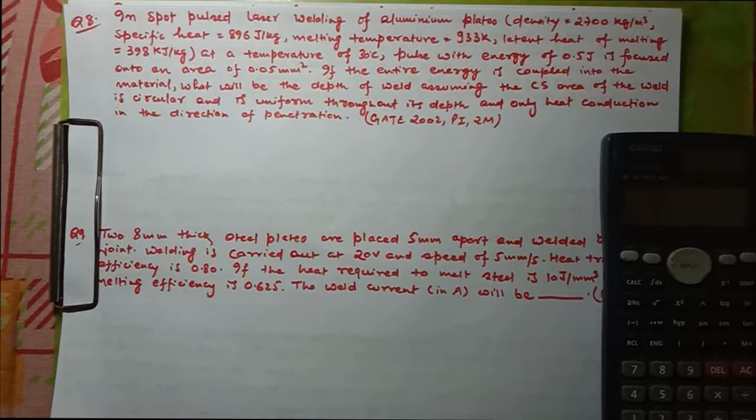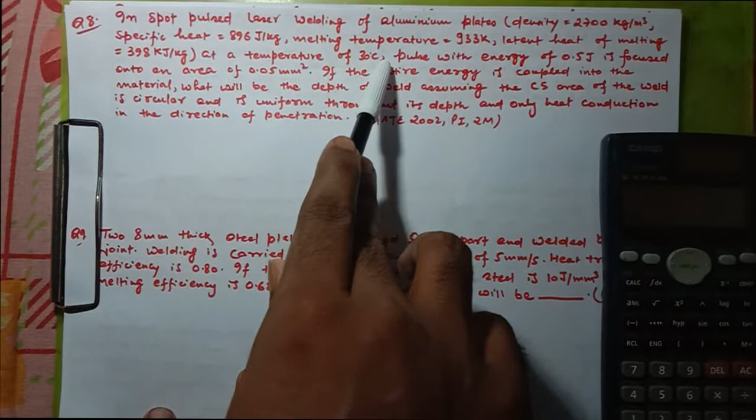अब वीडियो शुरू करते हैं। आज का पहला क्वेश्चन है: in spot pulsed laser welding of aluminium plates, the density, specific heat capacity, melting temperature and latent heat of melting data are given. In spot pulsed laser welding of aluminium plates at a temperature of 30 degree Celsius — this is the temperature from where you are starting the weld operation — pulse with energy of 0.5 joules is focused onto an area of 0.05 mm square. If the entire energy is coupled into the material, what will be the depth of the weld, assuming the cross section area of the weld is circular and uniform throughout its depth, and only heat conduction in the direction of penetration? This question was asked in GATE 2002 production engineering for 2 marks.

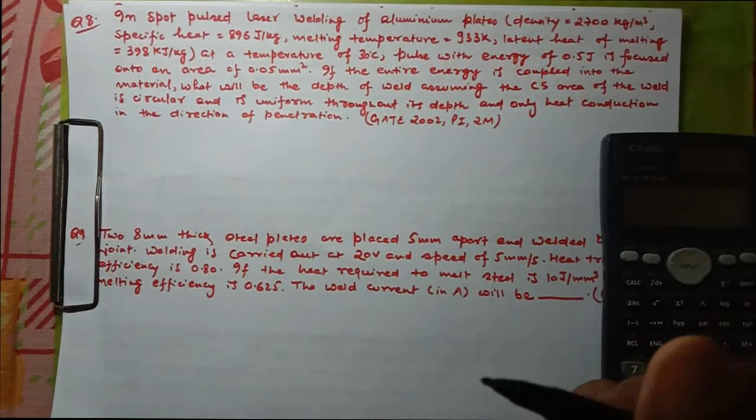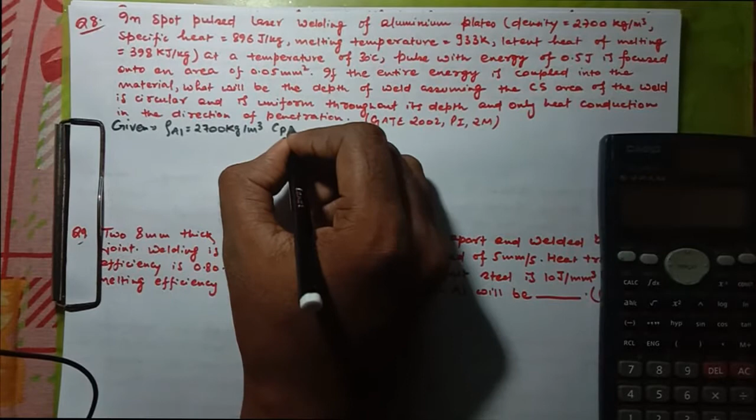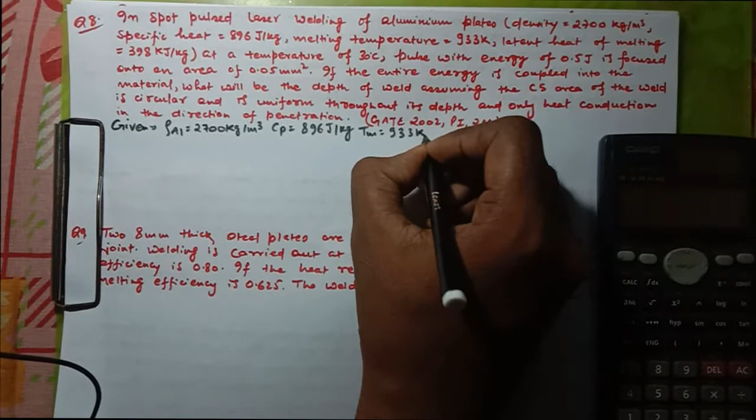So let us see how can we solve the question. First write down the given data. Density of aluminium is 2700 kg per meter cube. Specific heat of aluminium is 896 joule per kg. The melting temperature is given as 933 Kelvin, along with the latent heat of melting, that is 398 kilojoule per kg.

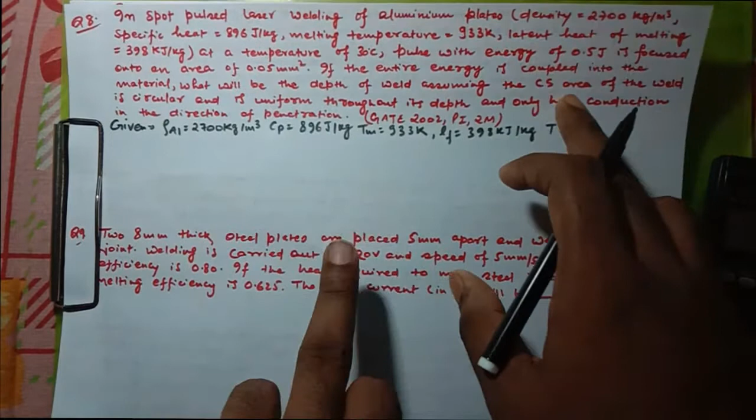साथ साथ में आपको रूम टेम्परेचर भी दिया गया है, और यह टेम्परेचर 30 डिग्री सेल्सियस है। अब यहाँ पर बहुत सावधान रहना है। मेल्टिंग टेम्परेचर केल्विन में दिया गया है, 933 केल्विन, बट जो रूम टेम्परेचर है जहां से आप वेल्डिंग स्टार्ट कर रहे हैं, वह डिग्री सेल्सियस में दिया गया है। सो यू हैव टू कन्वर्ट इट इनटू केल्विन, और यह 30 डिग्री सेल्सियस 303 केल्विन बन जाता है। अब इसके बाद हमें दी गई है पल्स विथ एनर्जी।

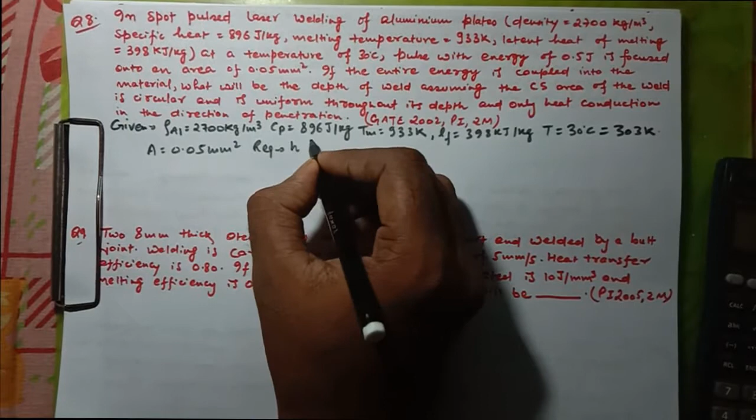How can we solve this question? First of all, we will try to find out the volume of the metal that is to be welded.

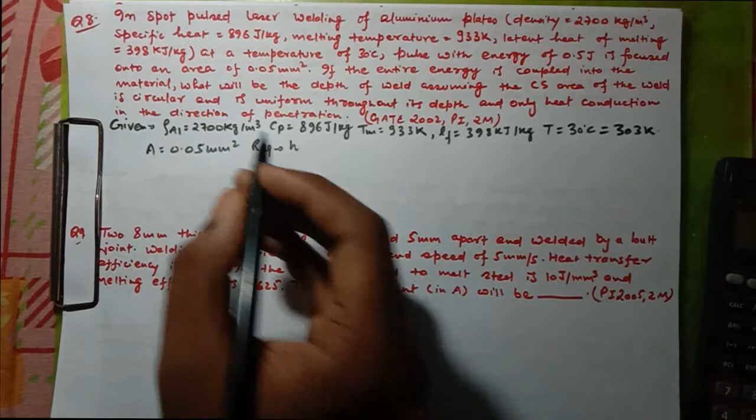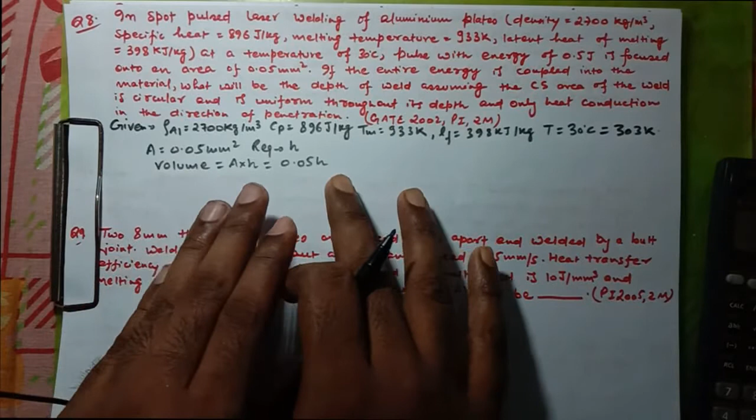So volume to be melted or welded, that is A into H, area into the depth H, that is 0.05 H. Now in order to melt this much volume, how much energy you will have to supply? This can be found out using the equation mc delta T, where delta T represents the temperature difference between the melting temperature and the room temperature from where you are starting the welding operation. So this Q, the heat required for melting this much volume, will be given by mc delta T plus mass into latent heat of melting or latent heat of fusion. This will give you the heat which is required to weld or melt this much volume.

Mass value is not given to you. In order to find out mass, what you will do is multiply density with volume. Density is given to you, that is 2700 kg per meter cube, into volume, which you have just calculated to be 0.05 H.

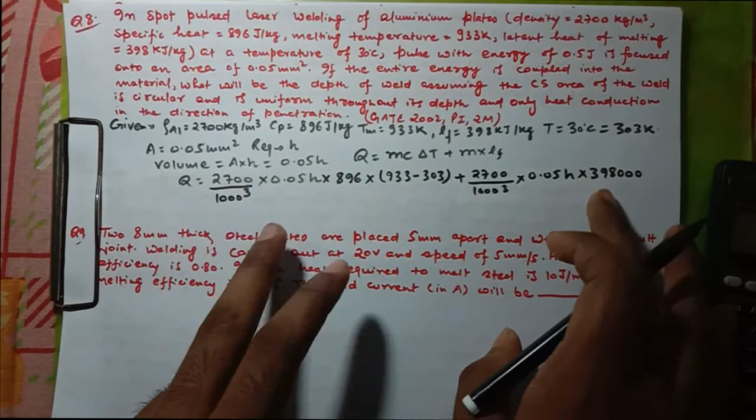So mass, again we can calculate by the same concept, that is 2700 by 1000 whole cube into the volume, that is 0.05 H, into latent heat of fusion, which is given as 398,000 joule per kg. So after adding these two expressions, we can get the total heat required for melting the metal.

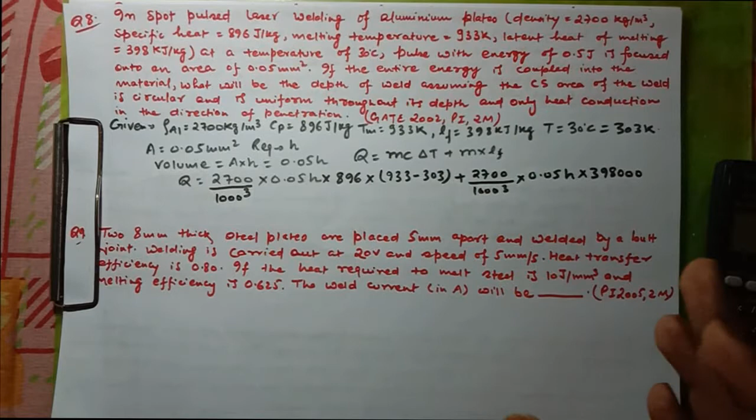Now where is this heat coming from? This heat is coming from the pulse which you are supplying onto the area. This data is given in the question, and that pulse is 0.5 joules. The 0.5 joules pulse of energy you are giving is providing the heat for raising the temperature up to the melting temperature and also changing its phase.

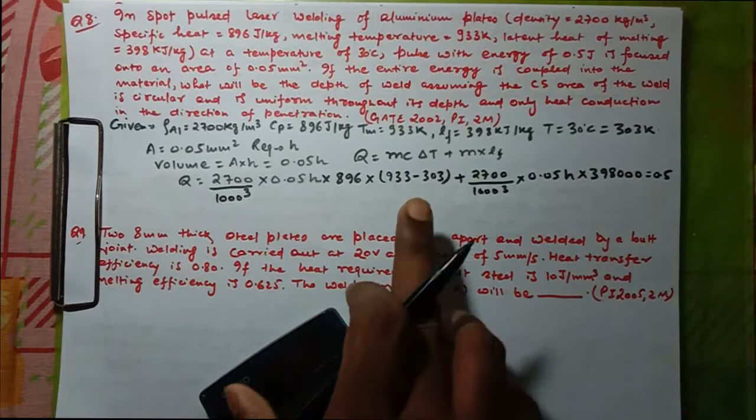So this total heat is coming from where? It is coming from 0.5 joules. Now you can clearly see that in this equation the only unknown is H. So after solving this equation, we can get the value of H. Let us solve this equation.

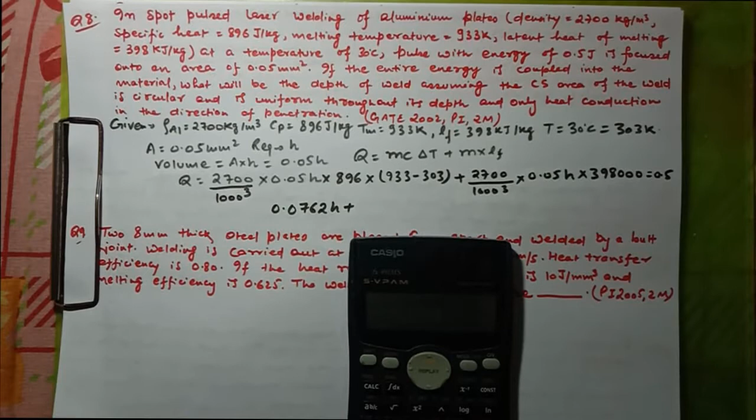This is 2700 into 0.05 into 896 into (933 minus 303) divided by 1000 whole cube. This comes equal to 0.0762 H plus 2700 into 0.05 into 398,000 divided by 1000 whole cube. This comes equal to 0.0537 H, which is equal to 0.5.

Now you can easily solve to find H, and that is 0.5 divided by 0.0762 plus 0.0537. So the value of H comes equal to 3.849 mm, which is approximately equal to 3.85 mm.

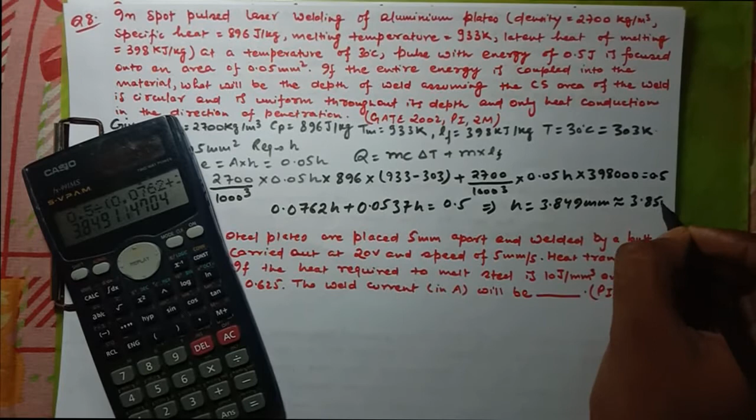So this was the solution for the first question.

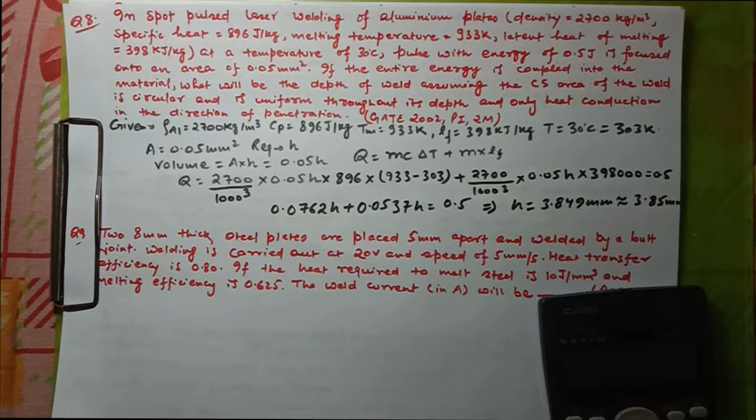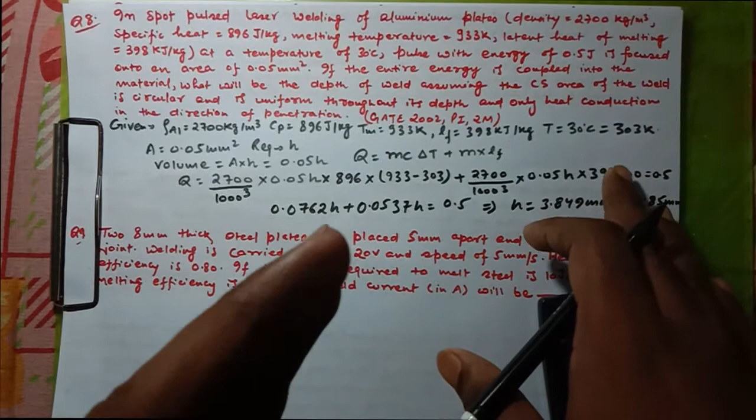And where was this energy coming from? This energy was coming from the pulse which you are providing of 0.5 joules. So at last we equated this heat energy with the pulse that we were providing, that was 0.5 joules. And after solving this equation, finally we got our answer H to be 3.85 mm.

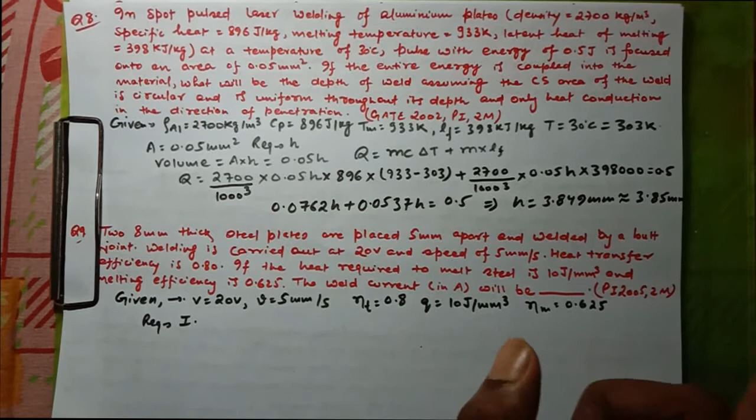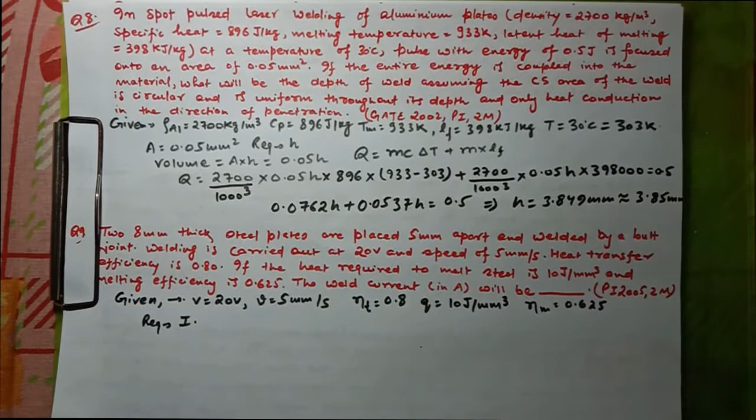So assuming a unit width of the steel plates, assuming unit width of the weld, let us calculate the volume that is to be welded. The total volume to be welded is 8 into 5 into 1, that is 40 mm cube.

This is the volume that is to be welded. Now we know the heat required to melt unit volume of steel is 10 joules per mm cube. So the heat required to melt this much volume can easily be calculated by multiplying this small q with the volume we just calculated, and that comes equal to 40 joules. So this much heat energy is required to melt the steel.

Now we have been given the welding speed and the voltage. This heat of 40 joules, where is it coming from? It is coming from the power you are providing, calculated using V into I. So the heat supplied per unit length of weld, or per unit width of weld, is given by VI upon the welding speed.

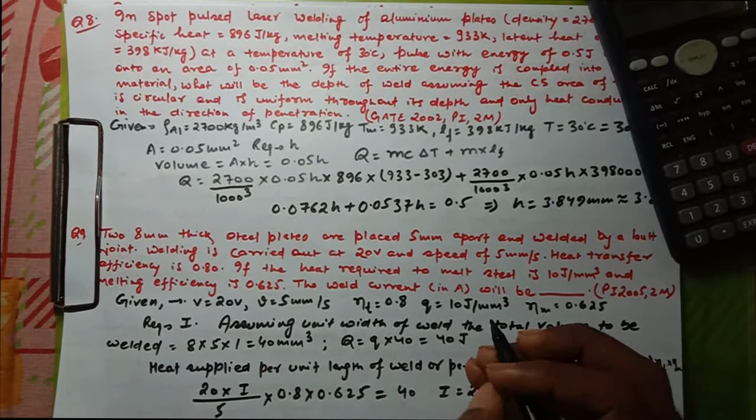Now, the heat required to melt unit volume of steel was 10 joules per mm³. So the heat required to melt this much volume will be equal to 10 joules into 40. So 10 into 40, that heat came equal to 400 joules. So this was the heat that was required to melt this much volume.

Now after knowing that this much heat is required, we calculated where this much heat will come from. This heat was supplied by the power which you were supplying. So that was equal to 20 into I upon welding velocity, because we have assumed our weld to be of unit width. So we had to calculate the heat supplied per unit width of the weld, that is V into I upon welding velocity into transfer efficiency into melting efficiency.

And finally after equating these two data, we calculated our current I to be equal to 20 ampere, because here we had left 1 0. So in the answer we will also get I equal to 200 amperes. So this was the solution to the second question.

Now let us move on to the third question.

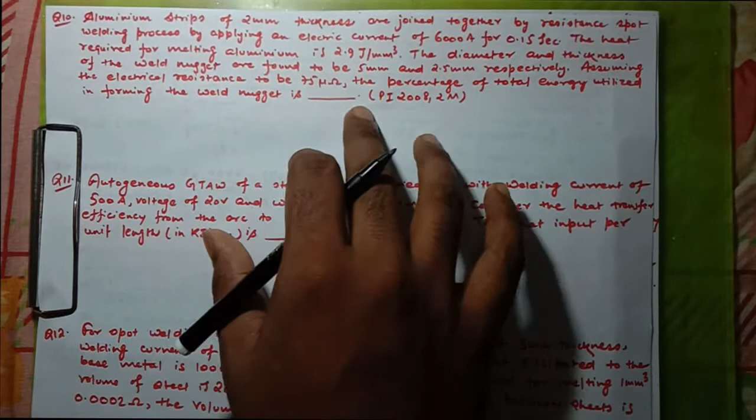The third question says that aluminium strips of 2 mm thickness are joined together by resistance spot welding process by applying an electric current of 6000 amperes for 0.15 seconds. The heat required for melting aluminium is 2.9 joules per mm³. The diameter and thickness of the weld nugget are found to be 5 mm and 2.5 mm respectively. Assuming the electrical resistance to be 75 micro ohms, find the percentage of total energy utilized in forming the weld nugget. This question was asked in 2008 in production engineering for 2 marks.

So how can we solve it? First of all, write down the data which is given to us. The given data is: electric current is 6000 amperes. The current is passed for a time period of 0.15 seconds. Heat required for melting aluminium, unit volume of aluminium, small q, that is 2.9 joules per mm³.

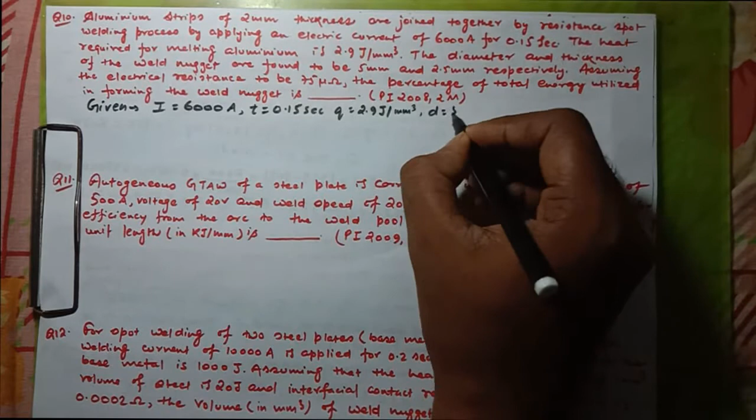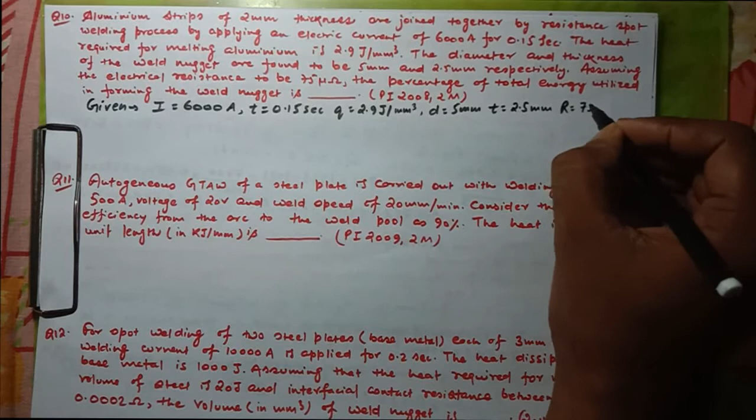The diameter and thickness of the weld nugget: diameter is 5 mm, thickness of the weld nugget is 2.5 mm. Assuming electrical resistance to be 75 micro ohms, find the percentage of total energy utilized in forming the weld nugget. So you have to find out the percentage of total energy utilized. So how can we solve this question?

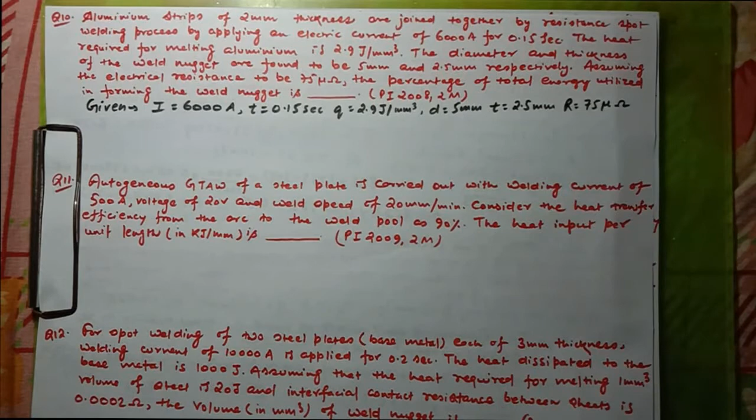So the volume to be melted will be equal to pi d square by 4 into the thickness of the weld, that is pi into 5 square by 4, multiplied with 2.5. So the volume to be melted is pi into 5 square into 2.5 upon 4, that is 49.087 mm cube. So this is the volume which is to be melted.

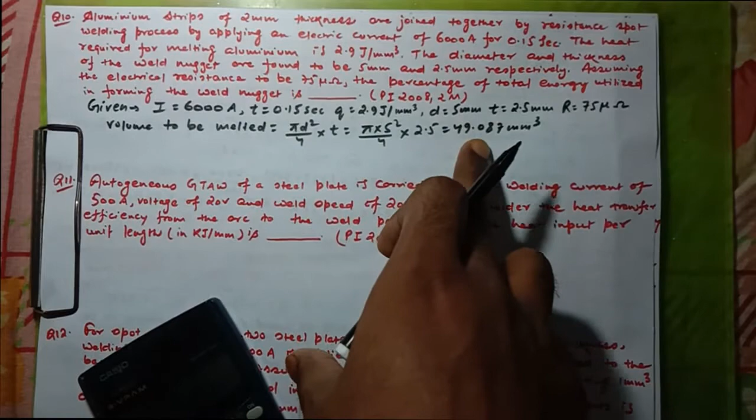Now we know the heat required to melt unit volume of aluminum is 2.9 joules. So the total heat required to melt this much volume will be calculated by multiplying 2.9 with this data. So the total heat, capital Q, which is required to melt this much volume will be 2.9 into 49.087, that is 142.352 joules. So this is the heat which is required for melting and welding.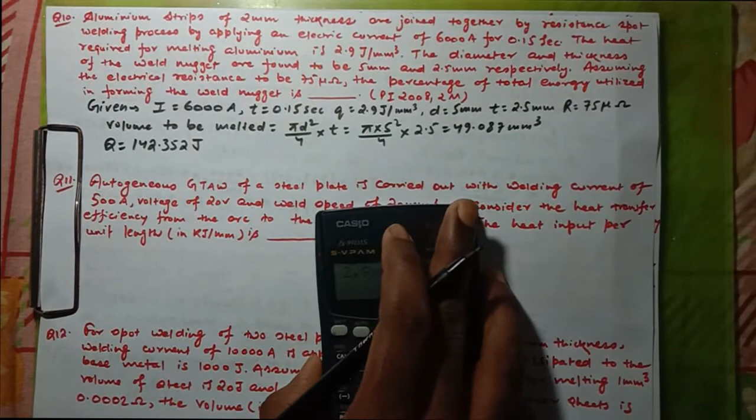Now what is the total heat which you are supplying? The total heat which you are supplying can be calculated by simply using the equation which we are using since our school days, and that equation is Q is equal to I square RT. This will give us the total heat which we are supplying. So Q is equal to I square R into T. We know I, we know R, we know T.

So Q is 6000 square, R is 75 micro ohms, and time T is 0.15. So this total heat which you are supplying came out to be equal to 6000 whole square into 75 into 10 to the power minus 6 into 0.15, that is 405 joules.

Now in front of you, this heat is telling you the heat required for melting, and this other heat is telling you the total heat which you are supplying. Now what you have to calculate is the percentage of total energy utilized in forming the weld nugget.

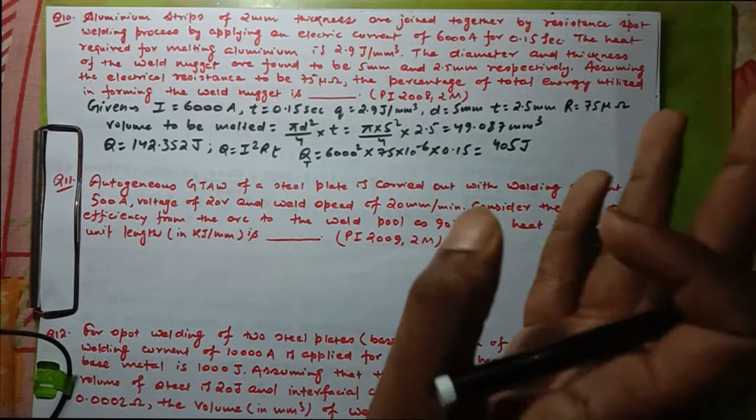So this can easily be calculated as a percentage. We know how to calculate percentage since our school days. So the percentage will be equal to 142.352 upon 405 into 100, and that will be equal to 142.352 divided by 405 into 100.

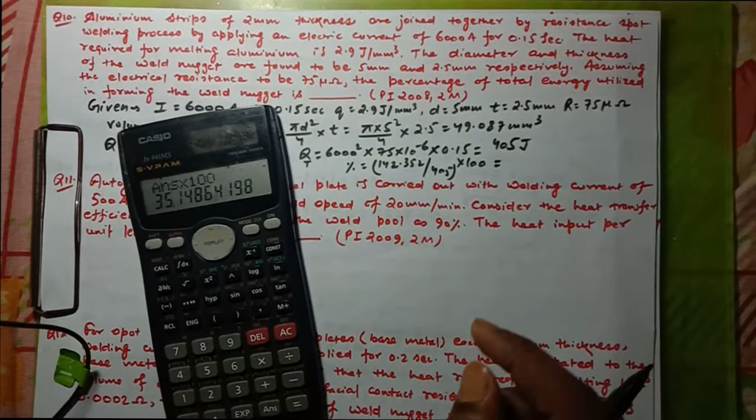So this percentage came out to be equal to 35.15%. So this was the solution to the 10th question, the third question for today, and the 10th question among the total questions which we have solved till now in the welding chapter.

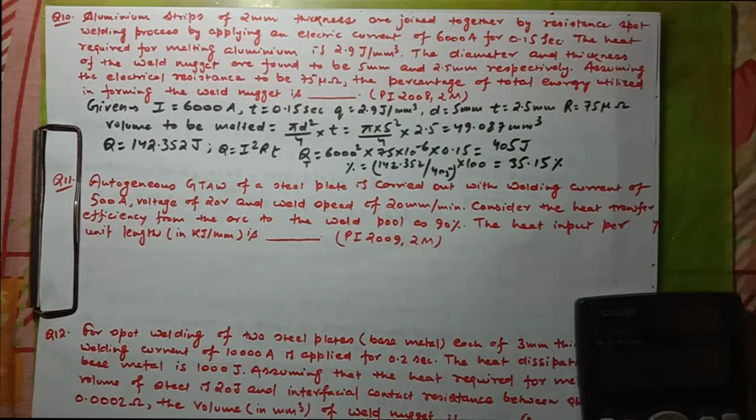Now let us move on to the 11th question. The 11th question says the autogenous GTAW gas tungsten arc welding of a steel plate is carried out with welding current of 500 amperes, voltage of 20 volts, and welding speed of 20 mm per minute. Consider the heat transfer efficiency from the arc to the weld pool as 90%. So the heat input per unit length in kilojoules per mm is what we need to find. This question was asked in 2009 in production engineering for 2 marks.

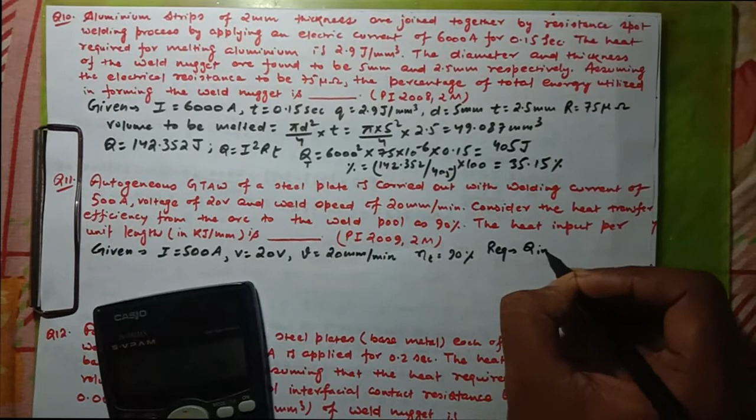What has been asked of you is to find the required data, that is heat input in kilojoules per mm. That is, you have to find out the heat required to weld per unit length of weld.

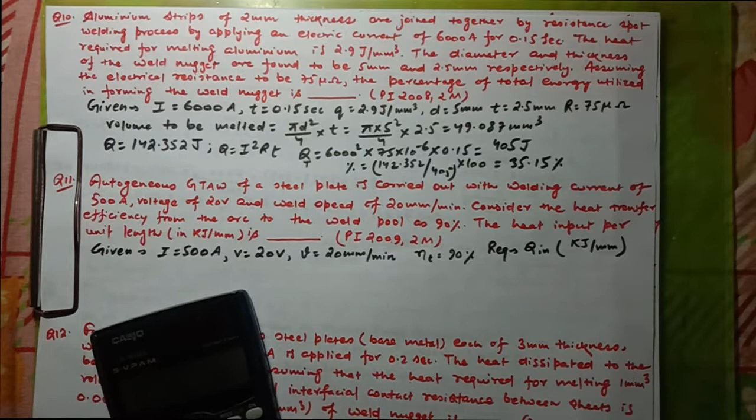So how can you calculate it? We know from our discussion in the last video also that the heat required per unit length of the weld is given by Vi upon the welding speed, that is V. But since here we are also given the heat transfer efficiency, we will have to take it into consideration, and that is eta.

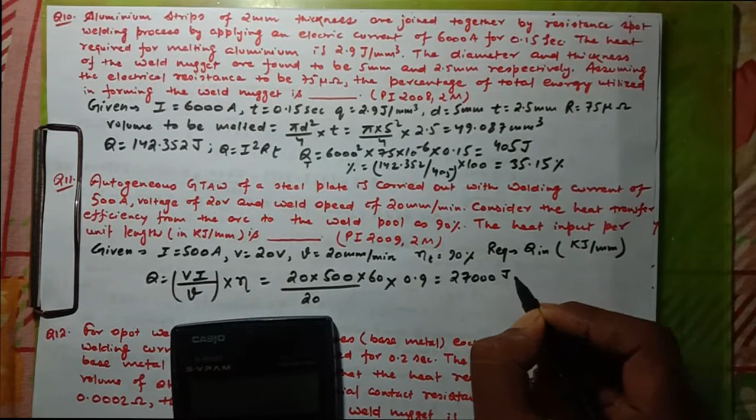So now put the values of all the data given to us. Current is 500 amperes, voltage is 20, welding speed is 20 mm per minute. In order to convert the minute into seconds, you multiply the numerator with 60, and finally multiply it with the efficiency, that is 0.9. So after solving this, you get 20 into 500 into 60 into 0.9 divided by 20, which comes out to be equal to 27,000 joules per mm, and in kilojoules per mm that will be equal to 27 kilojoules per mm.

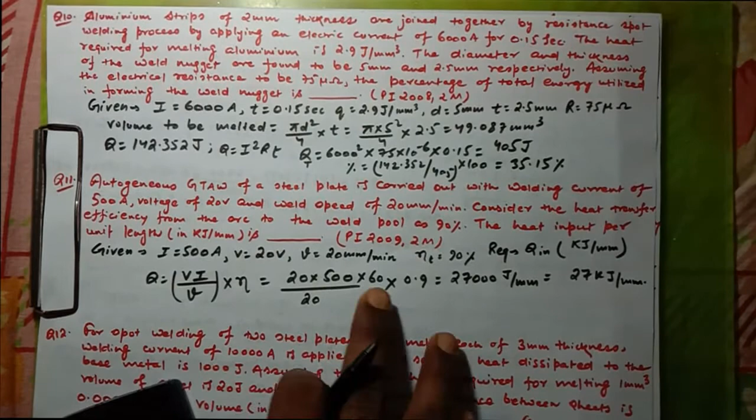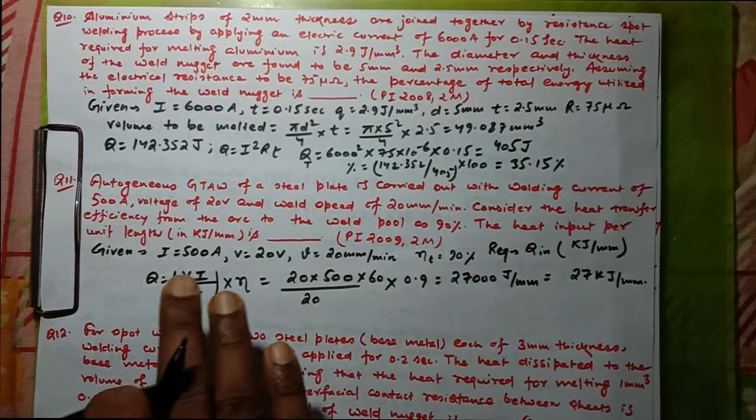Let's revise once again what we did. We had to find out the heat input per unit length. We know that heat input per unit length is given by the formula VI upon welding velocity, but since here the efficiency of heat transfer is also to be considered, we multiplied it with the efficiency of heat transfer, and after putting all the data given to us, we found our answer to be equal to 27 kilojoules per mm.

Now let us move on to the 12th question. The 12th question says for spot welding of two steel plates each of 3 mm thickness, welding current of 10,000 amperes is applied for 0.2 seconds. The heat dissipated to the base metal is 1000 joules. Assuming that the heat required for melting 1 mm cube volume of steel is 20 joules, and interfacial contact resistance between sheets is 0.0002 ohms, the volume of the weld nugget is...

So you have to calculate the volume of the weld nugget. This was asked in 2014 for 2 marks. Let us see how we can solve this question. We don't have space here, we will have to take a new page for it.

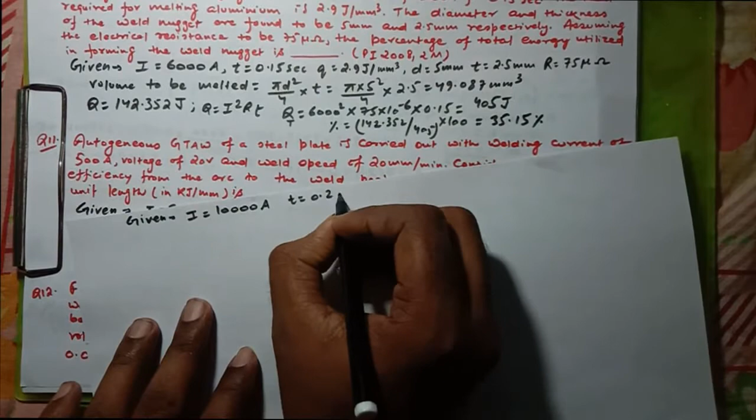The welding current is given to you, that is 10,000 amperes. Also you are given the time period, for how much time you passed the current, that is 0.2 seconds. Heat dissipated to the base metal is 1000 joules.

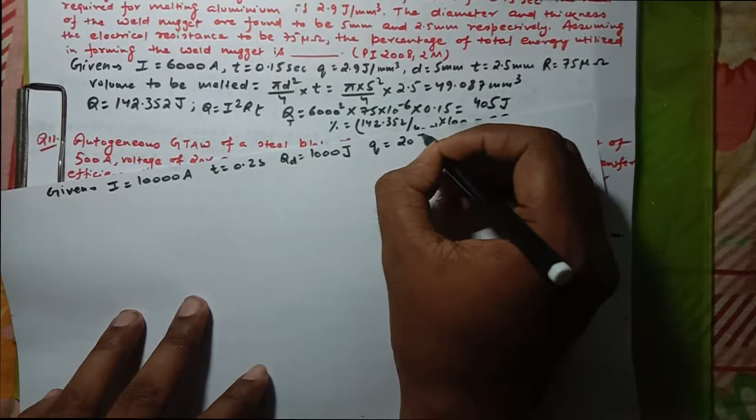Assuming the heat required for melting 1 mm cube of volume of steel is 20 joules, so in order to melt 1 mm cube of steel you have to supply 20 joules. So the heat required to melt unit volume of metal is 20 joules. Contact resistance R is given to you, and that is

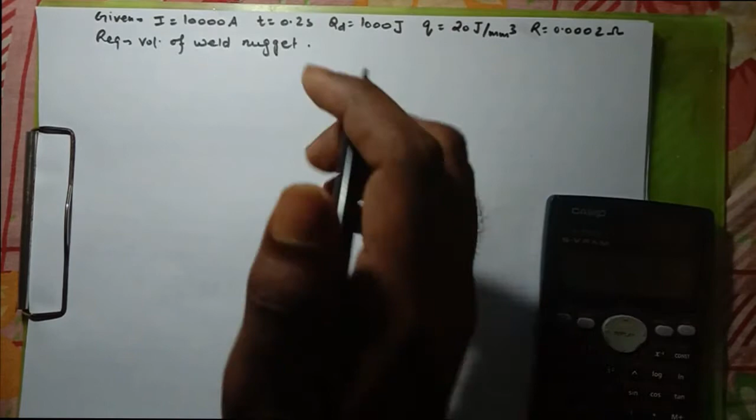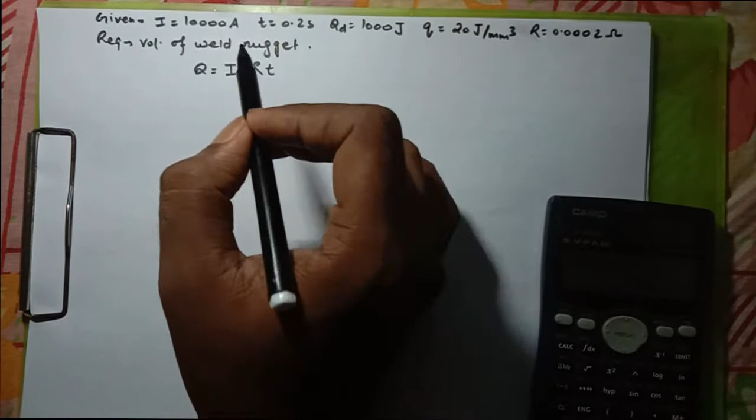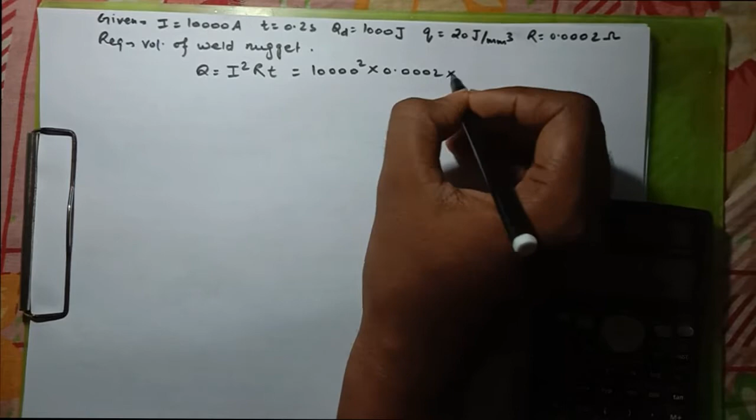I is 10,000, resistance is 0.0002 and the time T is 0.2. So this will come out to be equal to 10,000 square into 0.0002 into 0.2, this will be equal to 4000 joules. So you are supplying 4000 joules of energy.

Now you have also been told that from this 4000 joules of energy, 1000 joules is getting dissipated to the base metal. That heat is not getting utilized to form the weld nugget because it is getting transferred, it is getting dissipated to the base metal. 4000 joules you are supplying, out of 4000 joules, 1000 joules you've been told is not going into forming the weld nugget, it's getting lost in the base metal, dissipated as heat.

So the total heat which you are supplying, which is getting involved in forming the weld nugget, is how much? That is equal to 4000 minus the heat which is getting dissipated to the base metal, that is 1000. So the heat which is required, which is actually playing a role in forming the weld nugget, is 4000 minus 1000, that is 3000 joules.

Now you know that the total heat which is playing a role in forming the weld nugget is 3000 joules. You know that the heat which is required for melting or welding the unit volume of metal is 20 joules per mm cube, and you have to find out the volume of the weld nugget.

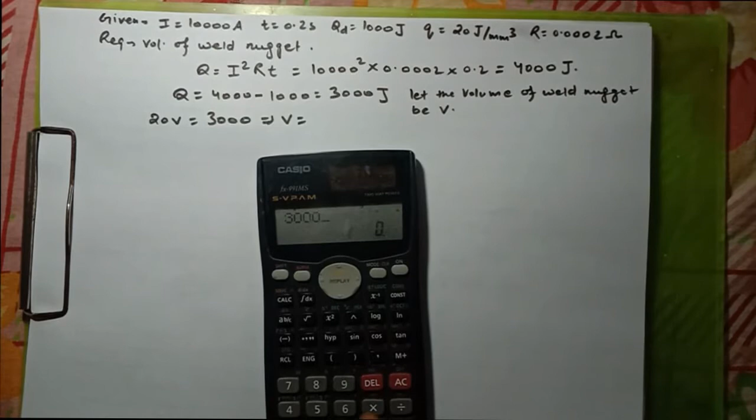And this heat is coming from where? This heat is coming from the 3000 joules of energy which you are providing to the weld nugget. So equate it with this energy, and after calculating you will find the volume V to be equal to 3000 divided by 20, that will be equal to 150 mm cube.

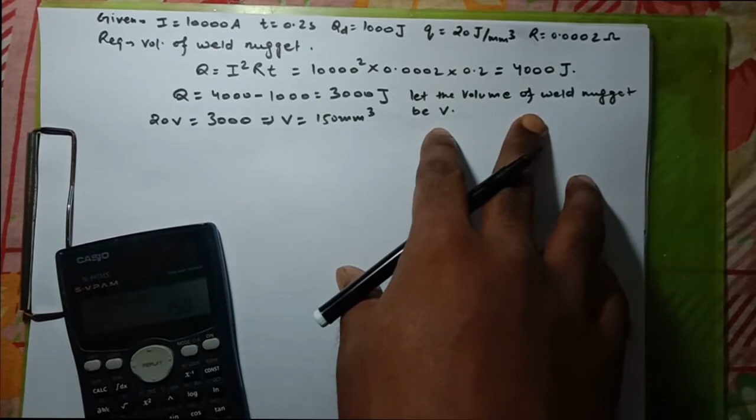Now we know the heat required for melting unit volume of metal is 20 joules per mm cube. So the total heat required for melting V volume of weld nugget will be 20 into V, and that heat is coming from 3000 joules. So we equated these two and found V to be equal to 150 mm cube.

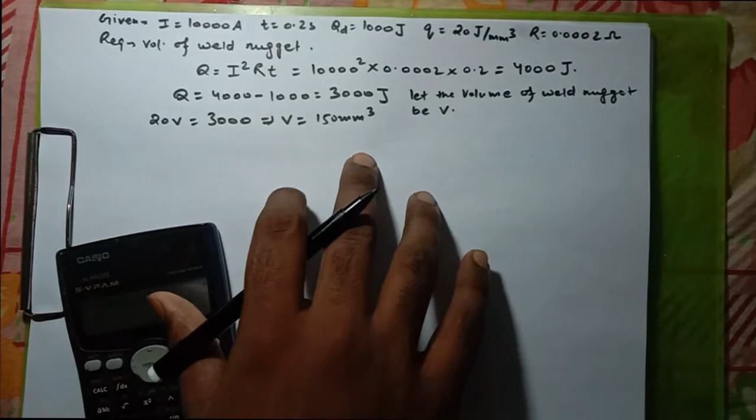So this was the solution to the 12th question which we solved. Now let us move on to the 13th question, and the 13th question says:

During a TIG, tungsten inert gas welding process, the arc current and arc voltage are 50 amperes and 60 volts respectively.

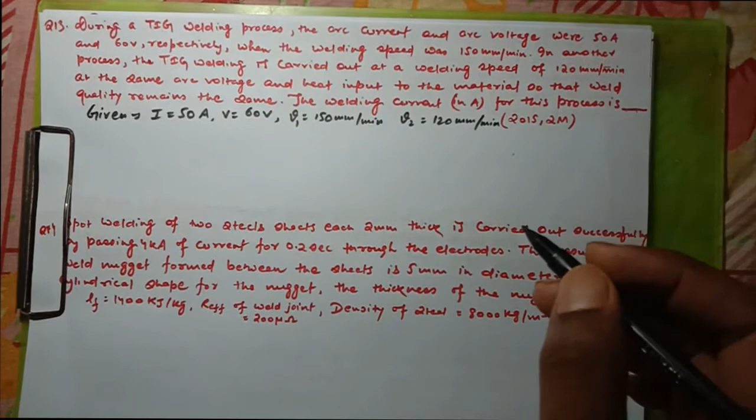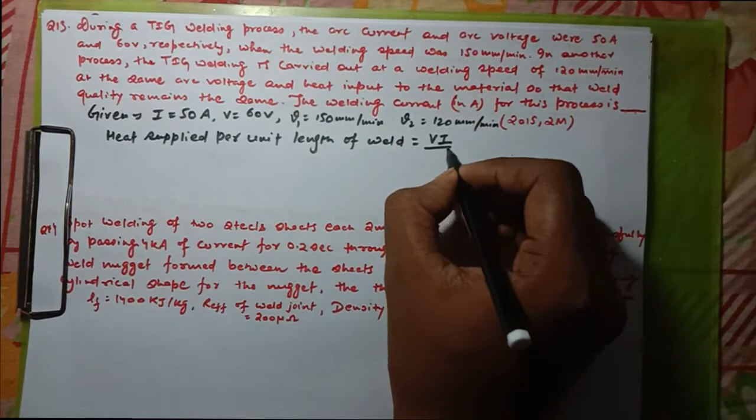So we know, since here the heat input to the material is same, we know the heat supplied per unit length of weld is given by VI upon welding velocity. Now you have been told that the heat input to the material is same for both the TIG welding operations, so this heat supplied per unit length will be same for both the processes.

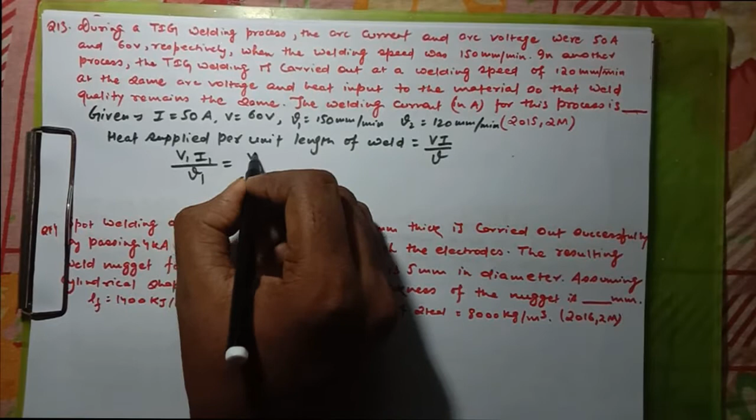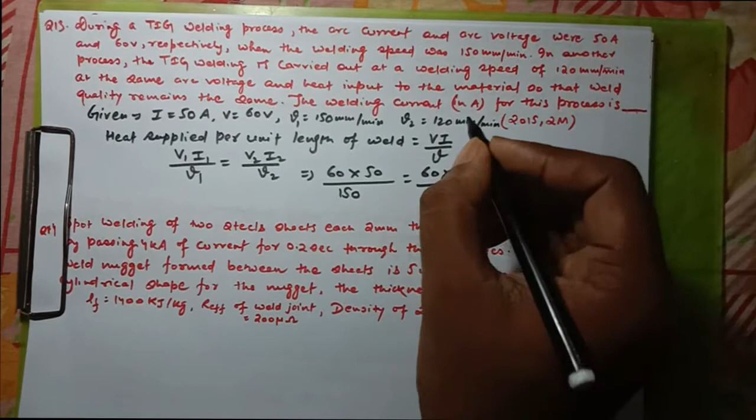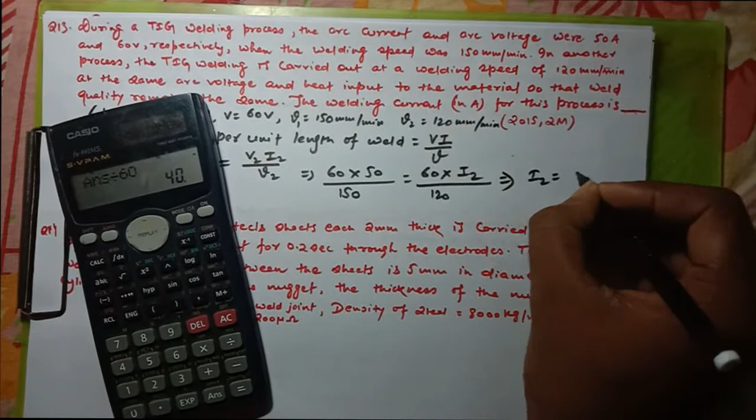Now we know it means that V1 I1 upon velocity V1 will be equal to V2 I2 upon velocity V2. So V1 is known to us, that is 60 volts. Current I1 is known to us, that is 50 ampere. Welding velocity V1 is 150 mm per minute. In process 2 the voltage is same, that is given in the question, that is 60. I2 is being asked and the welding velocity V2 is 120. So after solving this equation, finally we will get I2 to be equal to 60 into 50 into 120 divided by 150 divided by 60, that is I2 is equal to 40 amperes.

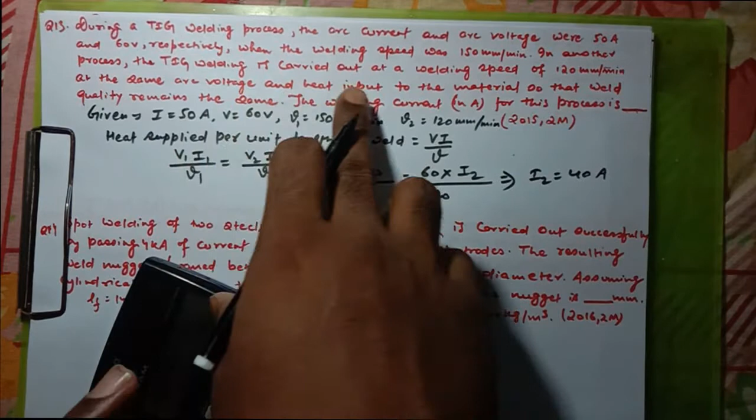Now you know that heat supplied per unit length of weld is given by VI upon velocity V, and since you have been told that the heat input in both the processes are same, you can equate the heat input in both the two processes, that is V1 I1 upon velocity V1 will be equal to V2 I2 upon velocity V2.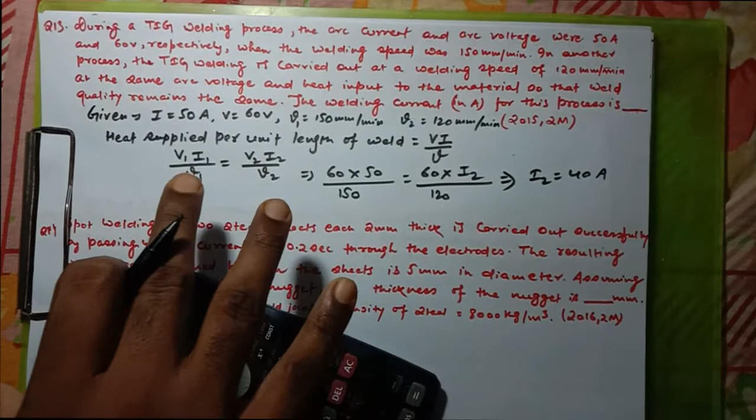After solving this equation, the value of current I2 comes equal to 40 amperes. So this was the solution for the 13th question.

Now let us move on to the 14th question. Due to space constraints, we discussed the 14th question on the next page.

The 14th question says that spot welding of 2 steel sheets, each 2 mm thick, is carried out successfully by passing 4 kA of current for 0.2 seconds through the electrodes. So the value of current and the time for which the current is passed is given to you.

The resulting weld nugget formed between the sheets is 5 mm in diameter. Assuming cylindrical shape for the nugget, the thickness of the nugget is asked in mm. Also, you are given the latent heat of fusion, effective resistance of weld joint, and density of steel. So first of all, write down the data which is given to us.

So the current is given to us and the current is 4000 amperes. The time for which the current is passed is 0.2 seconds. The diameter of the weld nugget is given and that is equal to 5 mm.

You have been asked the value of thickness, but here the latent heat of fusion is given at 1400 kilojoules per kg. The effective resistance is given and that is 200 micro ohms, and the density of steel is given and that is 8000 kg per meter cube.

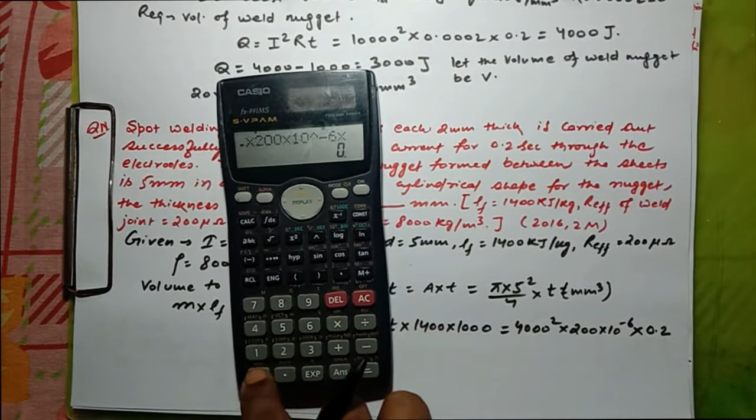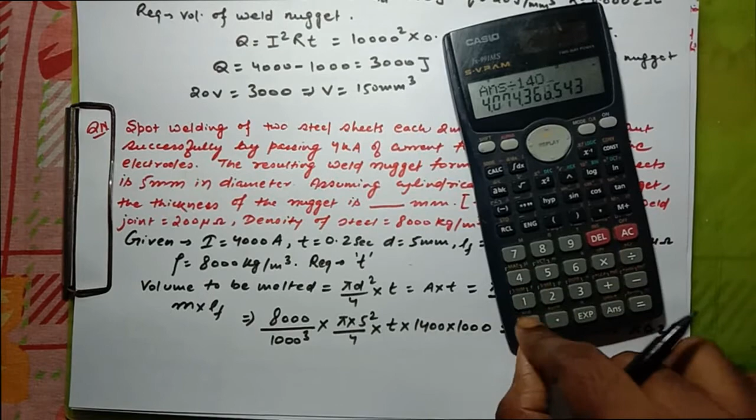4000 square into 200 into 10 to the power minus 6, into 0.2, into 4, into 1000 cube, divided by 8000, divided by pi, divided by 25, divided by 1400, divided by 1000, and this gives you the value of thickness of the weld nugget equal to 2.91 mm. So this is your answer.

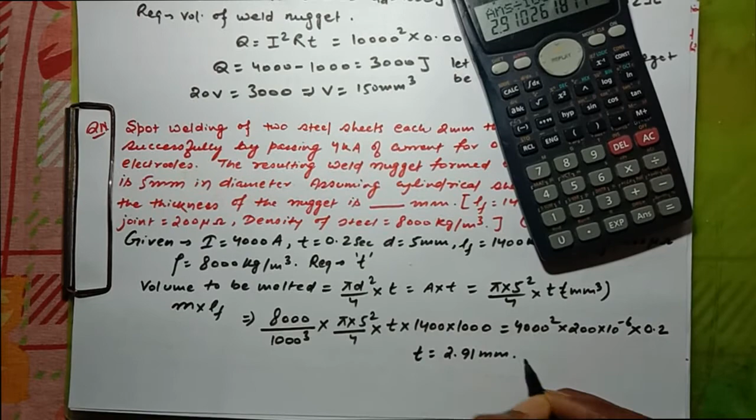This question was asked in 2016 for 2 marks.